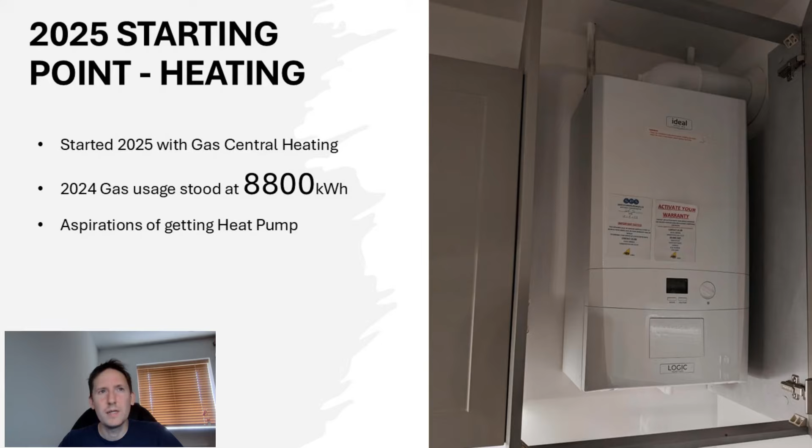Looking back at 2024, we ended the year with 8,800 kilowatt hours of gas usage for heating and hot water. We had aspirations of getting a heat pump, but going into 2025 hadn't yet found the right deal. In terms of solar, it wasn't a great year for weather either. It was very wet. We were still quite close to our 5,000 kilowatt hours generation target.

And in October 2024, we added a new east and west array to bolster our generation. But going into 2025, we only had a couple of months of data from a shaded winter. So there were a lot of unknowns for that system going forward.

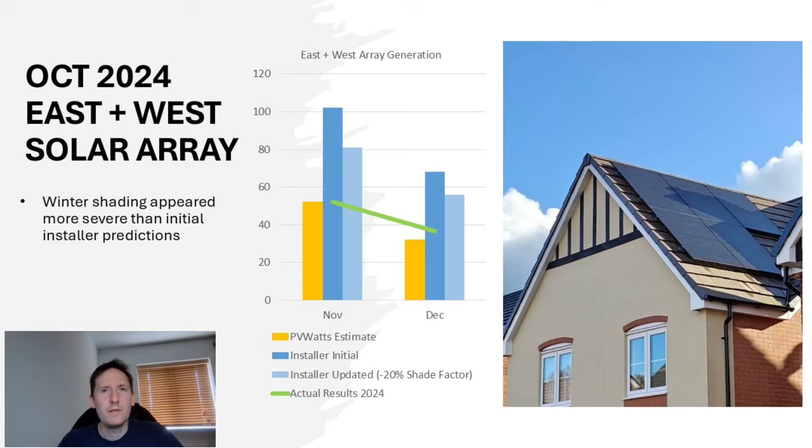We also have two EVs, which between them cover somewhere between 12 and 14,000 miles. The efficiency we believe to be around 3.7 miles per kilowatt hour, and the energy demand based on that is around about 3,500 kilowatt hours.

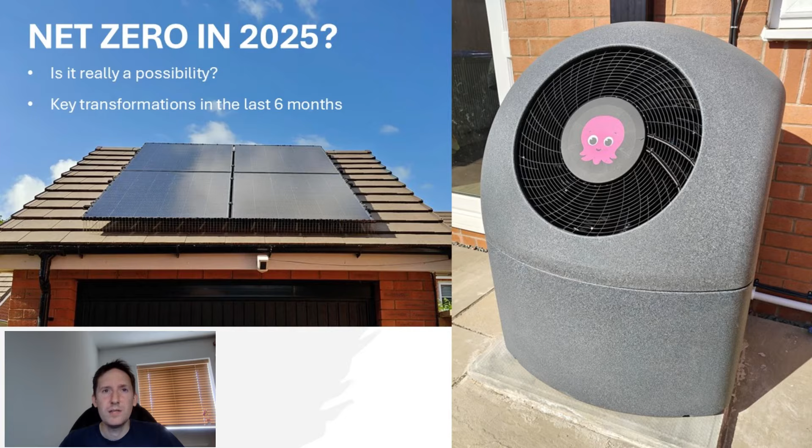With that all said, could net zero energy usage in 2025 really be a possibility? We have made a couple of key additions which perhaps give us a fighting chance this year. Let's get into the analysis.

When I started this channel, there were two key goals I had in mind. The first was to achieve net zero energy usage across the whole year, and by that I mean the annual energy import would be less than the annual energy export, and this would include everything, so heating, hot water, cooking, general household usage, and also I wanted to include charging of both our EVs, which we use for travel.

The second key goal was to achieve negative energy bills across the year. In theory, this should be a byproduct of achieving net zero energy usage, particularly where import prices and export prices vary depending on the time of use. There's a lot of smart tariffs out there that can result in financial viability and even profitability.

So what's my motivation for all of this? On a household level, I believe we're all accountable for our own energy usage. Our individual decisions can collectively make a difference, and we shouldn't wait for politicians to tell us to be greener. I believe the technology exists now, and we can make good use of it.

I want my children to grow up in a net zero energy household to set the best possible example for them and hope they share these values as they grow up. Strong energy independence also protects us from energy bill hikes. Being self-sufficient gives us that extra financial security where energy is concerned.

After continuing to research the topic, I managed to find a heat pump that was appropriate for the property. So we have a 115 square metre 4-bedroom home over 2 floors. The heat loss was measured at 4.9 kilowatts.

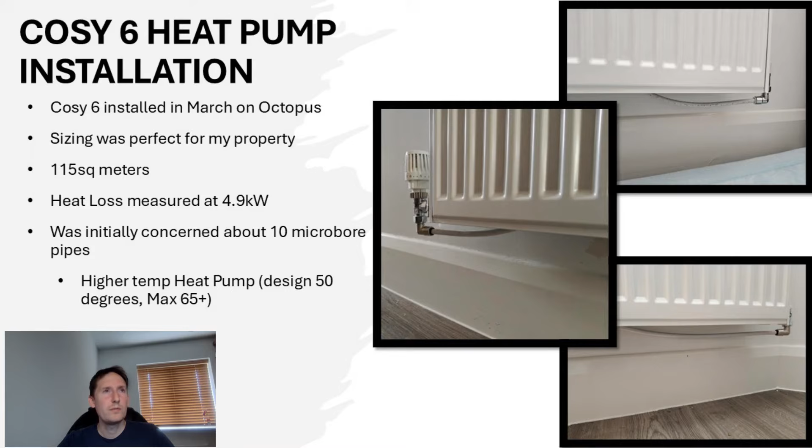The Cosy 6 has a design temperature of 50 degrees rather than, say, 40 that a lot of the others are. It can go over 65 if it needs to. So at that point you're looking at gas boiler temperatures, no problem at all, they're achievable. And overall this seemed like the right kind of product for our house. So as such we went ahead and installed the Cosy 6 in March.

Price was a big contributing factor to being able to go ahead with this. I had quotes in the region of £3,000 to £5,000, and that even included the boiler upgrade scheme grant, which is £7,500, which I consider to be essential for a lot of people to be able to afford heat pumps. Their base prices are still very, very expensive, and the installation price does vary massively from house to house. There's a lot of variables that determine how much it's going to be.

For myself, the stars absolutely aligned, and I'm so fortunate to say that it only cost me £150. I honestly couldn't quite believe it. I was expecting something a little over 500 to 1,000 thereabouts.

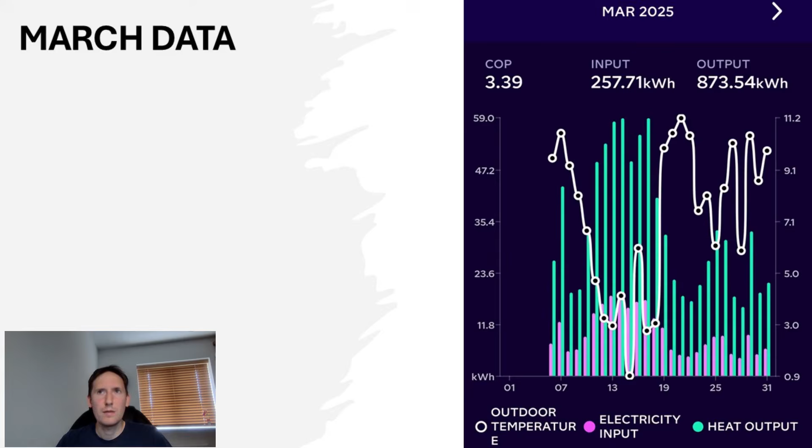So for March, we had a COP of 3.39, an input of just under 260, and an output of around about 873. For April, we had a much higher COP of 3.61, actually, an input of just 161, which means that's how much energy we used over the course of the month of April, and that gave us nearly 582 units of heat.

May, slightly lower COP this time, and you'll notice that our input is much lower. So what's happened here is our heating has not been needed, so a lot of these days are just hot water. Hot water typically has less efficiency, so you'll notice that the COP did drop, and it's a similar story for June as well. So we're looking at 3.47. The input there, very, very low. In fact, it's as low as 42.66. So a very, very cheap month, and we'll look at the numbers in terms of pounds and cost in just a moment.

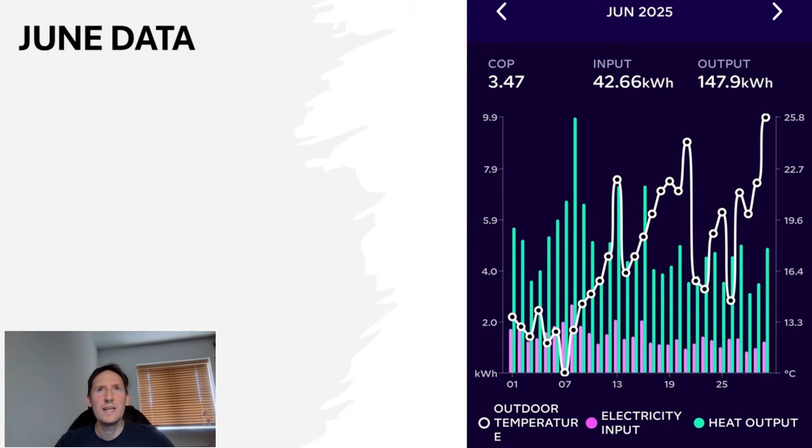But let's look at the lowest usage day. So that was June the 28th. We only used an input there of 822 watt hours for our hot water. Bearing in mind we have a 180 litre tank and we have a family of 4 living here.

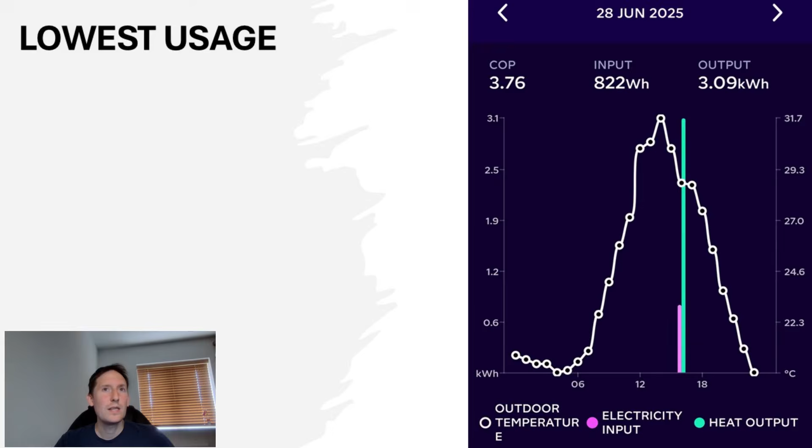Conversely, the highest usage day was actually March the 17th. Bear in mind we don't have any data prior to March the 6th. So March the 17th was the day in the time frame that we have that we used the most. The COP was actually respectable at 3.4. The input was as high as 17.36, but that is interesting and quite useful information because the Tesla Powerwall battery storage that we have, there's 2 of them, and they are 27 kilowatt hours in total. So in the winter, it does seem feasible that the batteries might be able to cover the entire heat pump on a cold day. So that would be good.

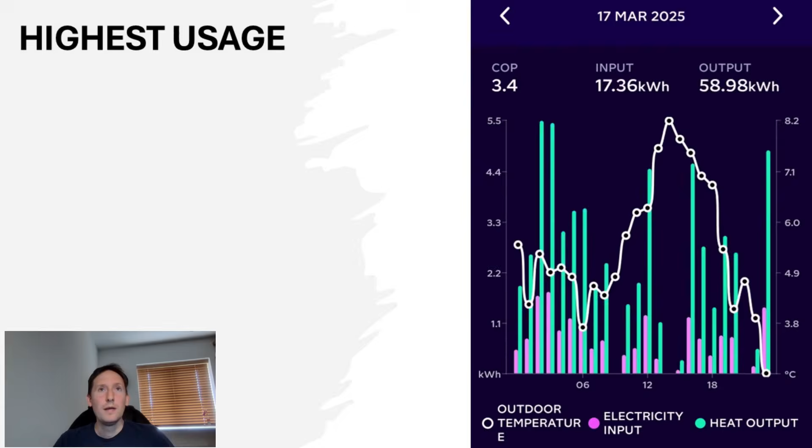In terms of highest coefficient of performance, that was the 30th of June. It wasn't quite 34 degrees as it says there. I think it was about 31 at that point. But you'll notice I've employed a tactic there of getting the hot water cycle on while the weather is warmest. So that gave me a COP of 4.02.

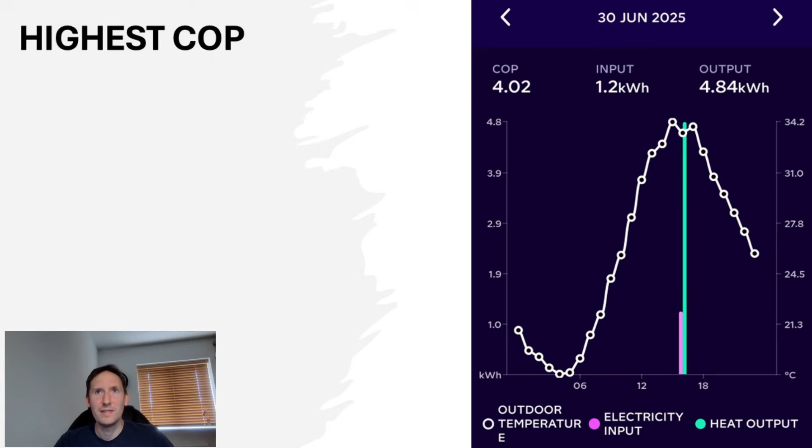So this chart shows how the coefficient of performance changed from month to month. So in March, that was our baseline data there, which gave us 3.39. Then in April, the temperatures did warm up quite nicely. We had a mixture of some heating. Most of the time we did have the heating on in April, but it was warmer, which made the heat pump more efficient. So that gave us 3.61.

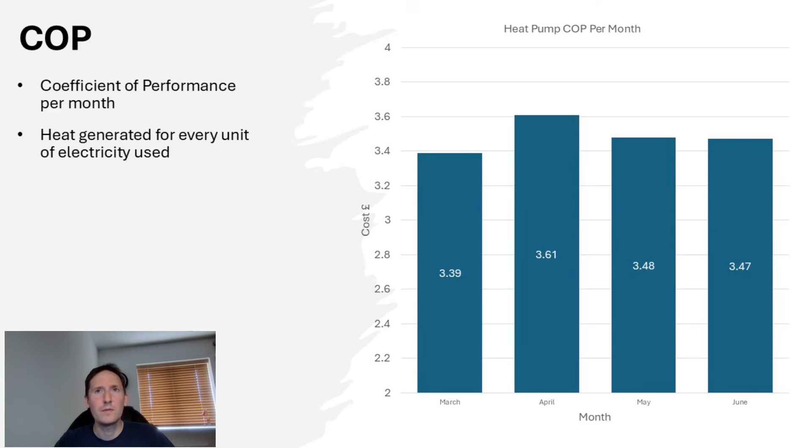In May, we had a combination of a small amount of heating, but obviously much warmer weather. And in June, we had absolutely no heating whatsoever. It was all just hot water. So that gives us 3.47 on that one.

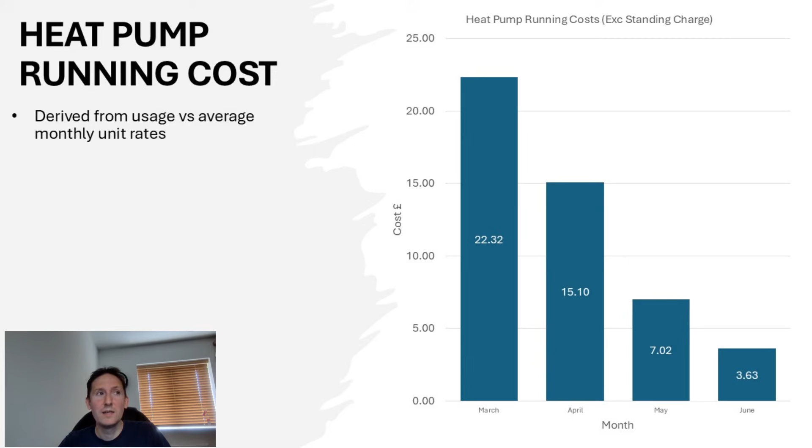So following those calculations, we can now look at the monthly cost of our heat pump. So these are our running costs. So March, £22.32, April, £15.10, May, £7.02, and June, just £3.63, which I think is pretty fantastic.

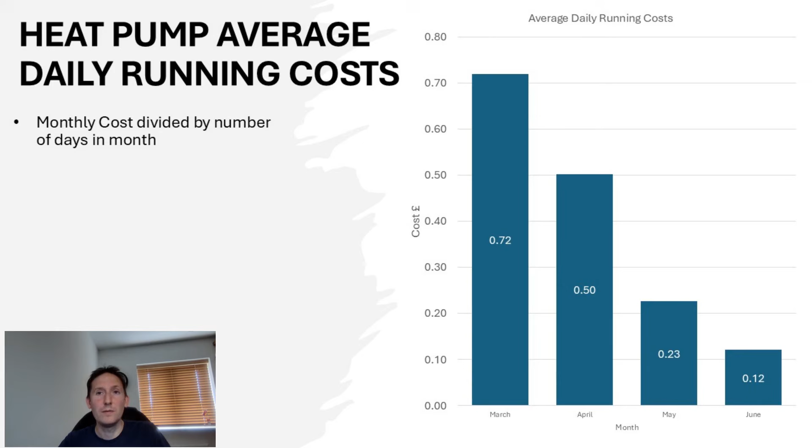So let's look at the average daily costs. So we're looking at 72 pence per day in March. April, we're looking at 50 pence per day. May, 23 pence per day. And June, as little as 12 pence per day. And just going back to the day we used the least amount of energy, there was one particular day where we used just under 7 pence to do our hot water, which is very impressive. So it's fair to say the heat pump looks to be a success at this stage.

But let's look at some of the other aspects of our energy usage, starting off with the gas usage that preceded the heat pump installation. So I still had gas between the 1st of January and the 3rd of March. In that time frame, we used 2,888 kilowatt hours, which is quite a lot. As of 5th of March, the meter was officially decommissioned and the boiler was removed.

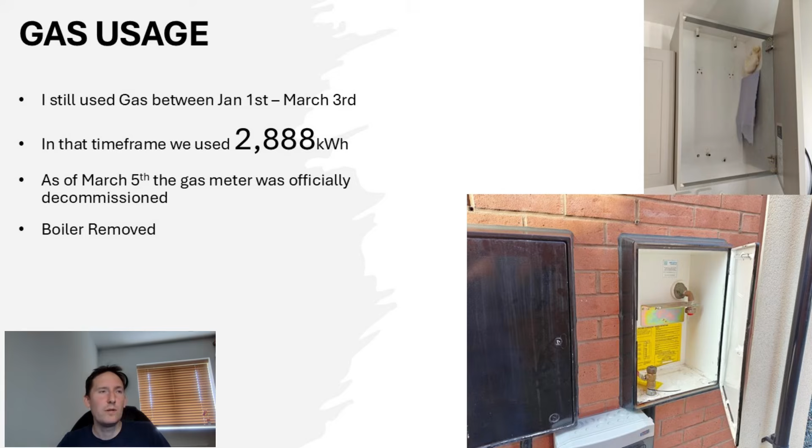Looking at EV charging, so I estimate between January and June it was in the region of 2,100 kilowatt hours. This is subject to a margin of error because our Project EV charger that came with the house, with it being a new build house, it had a charger, but it's not very smart. It doesn't log data, or if it does, I've not been able to find an app that actually is compatible with it at this stage.

So as such, we have some data logged from the Tesla granny charger that's in the garage. So that tracks a little bit of it. The rest of it I had to try and go through my Powerwall data, figure out my usage patterns, and try and establish what was car charging. Car charging does tend to stand out because I do it overnight and it tends to be around about 7.4 kilowatt hours.

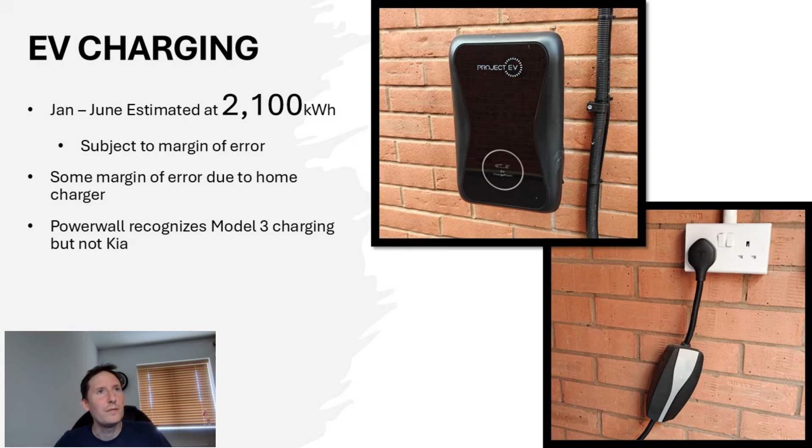And then for general household usage for the 6-month period between January the 1st and June the 30th, we are including cooking, washing, lighting, entertainment, so things like TV watching, computer, games consoles, and obviously working.

We're excluding vehicle charging, and just a note on the vehicle charging, I said that that was a bit of an estimate. Any kind of miscalculation on that would either come off or be added on to this general household usage one. So the total between the two will definitely be correct. It's just perhaps the ratio might be ever so slightly out if I've miscalculated that. But it's also worth noting that I have excluded heating from the heat pump and the gas usage, because we've covered that separately. So that gives us a total of 1,369.

Now, there is a bit of a hidden usage that we need to take into account as well, and that is storage and conversion losses. Now, as effective as storing energy is, it's never completely free. It needs converting from AC to DC, and then back from DC to AC again, and any battery management that goes on. So the total losses as a result of storage was 253 kilowatt hours.

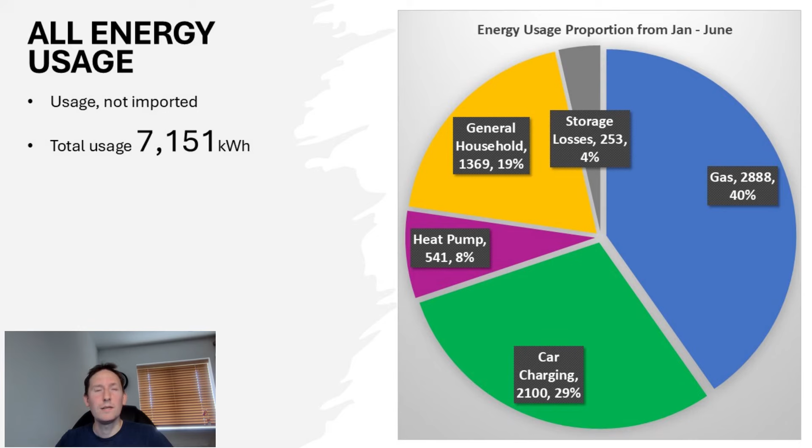Other than that, the next biggest looks to be the car charging, with general household actually taking up a smaller slice of the pie, and losses representing 4% of the total energy usage. So usage is half the battle when it comes to net zero energy usage, but what about generation?

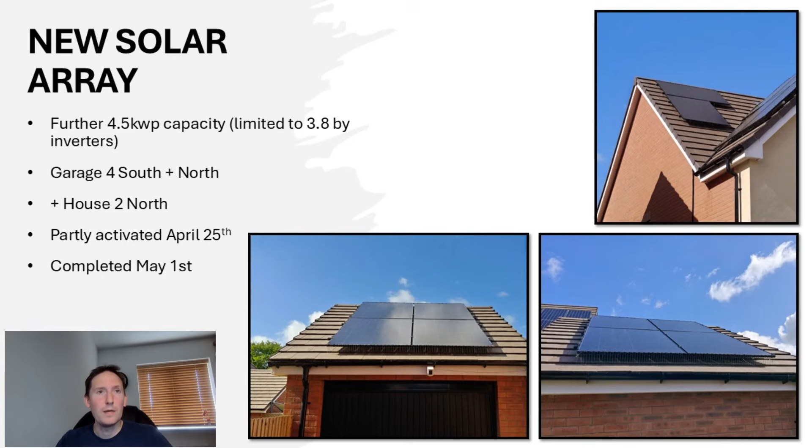That's the other half. And we did have a new solar array installed. This gives us an extra 4.5 kilowatt peak of capacity. It is limited to 3.8 by inverters, but this is a mixture of 4 south facing on the garage, 4 north facing on the garage, and 2 panels on the north of the house. The majority of this was activated on April the 25th, but it was completed on May the 1st, as there was a bit of an incident with a couple of the panels, so they had to get replaced.

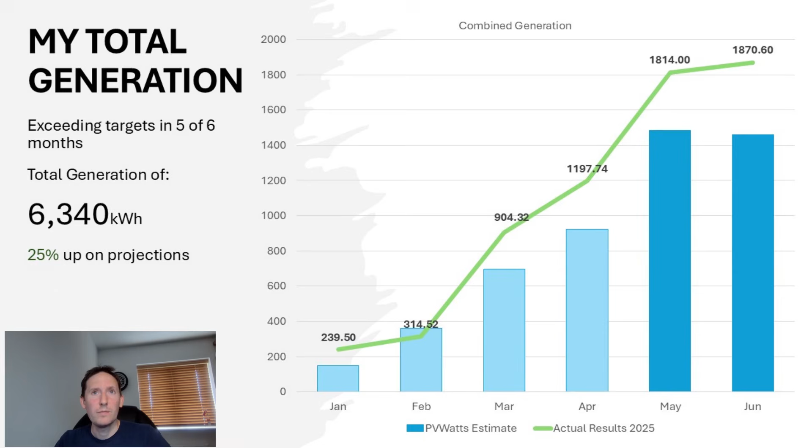So here is the total generation then, and it's been an incredible 2025. The start has been really, really nice. So we've managed to achieve total generation of 6,340 kilowatt hours, which is actually in total 25% up on the PV Watts projections. So on the right there you can see only February really is the one where we've fallen short on expectations. Other than that, we've been comfortably above, so that's really good to see.

I just wanted to highlight how fortunate we've been, anyone with solar panels in 2025, because it has been a fantastic year so far for solar. In fact, March, there's an article on the Met Office website that suggests it's actually the sunniest throughout the month since records began in 1910, with 185 hours of sunshine throughout the month.

And it wasn't just March that was good, April was good too. Great Britain managed to achieve maximum solar generation record according to Solar Power Portal. Obviously some of that was due to additional installations across the country, but there was also a great deal of sunshine there. Check out my monthly solar generation videos, and you'll see more details in terms of how my systems have been performing.

This does give us a solar offset at this point in the year, so end of June, of 88.66% of total usage. Now remember, this was including gas usage prior to March the 5th, and also we only had the additional solar fully online from May the 1st. So the second half of the year should be a little bit better than that.

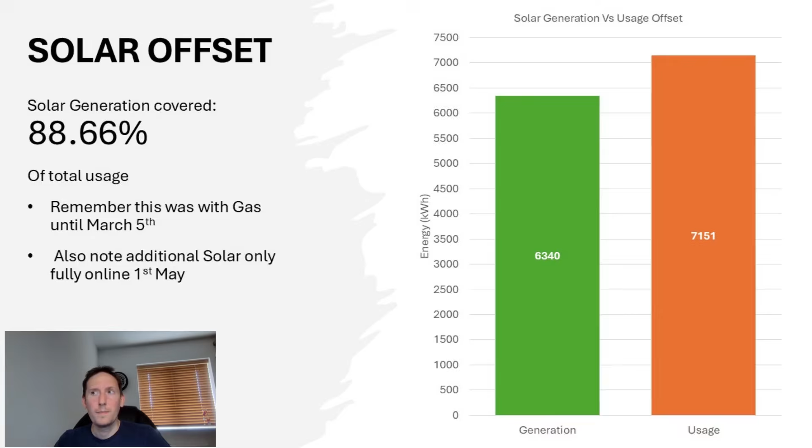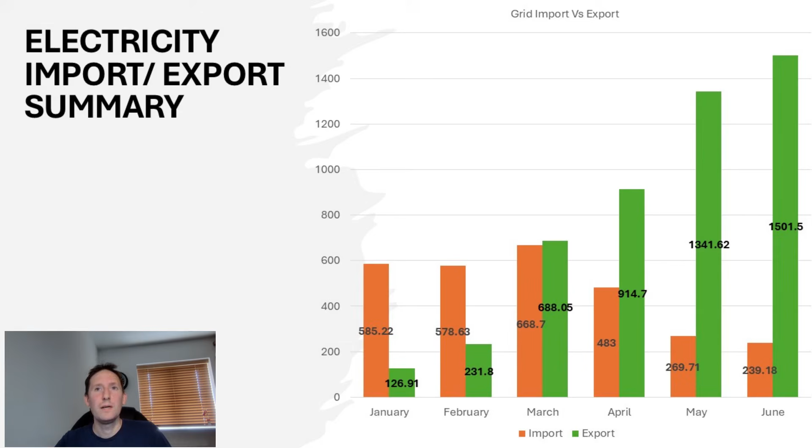So here is a visual summary of how the electricity import and export has changed. Note that January and February are a little bit low actually on import. They would be much higher, but because we're using gas, which is excluded from this particular table because we're only talking about electricity here, those values are a little bit low, but they are of course higher in winter and reducing downwards. The export does the opposite. It's very low in the winter with the seasonal variance, less light hitting those solar panels. May and June we do of course have that new installation, which makes a big difference to the amount of export there.

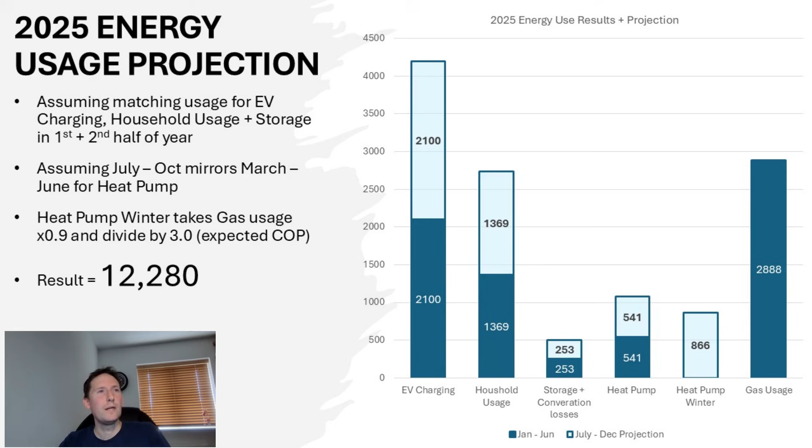For the heat pump, it's a little bit different because we only had that active since March, so we can make assumptions that July to October probably would mirror March to June. And for the winter side of what the heat pump might do, we can take the gas usage, multiply that by a factor of 0.9, and then divide by 3, if we're assuming an expected COP of 3, which I think is probably around about what we're looking at. If all those assumptions are correct, that would give us a result of around about 12,280. So that's energy usage.

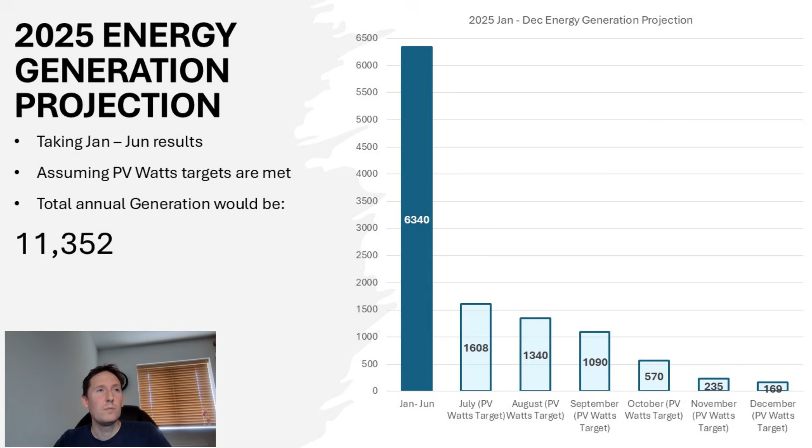Let's look at energy generation projections. We can take the January to June results as they are, and rather than extrapolating that based on the weather as it currently is, I think it probably makes more sense to assume the PVWatts targets are met. The annual generation in that instance, if you added all that together, would be 11,352. So looking at those two values, our solar offset is not quite enough to meet our usage, but you never know. We've had some very, very good weather in the first half of the year, so if we get that in the second half, that gives us a fighting chance.

And realistically, if we're able to get some savings in terms of energy usage, maybe we can find a few more efficiencies there. That might also give us a fighting chance. Ultimately, we were kind of undone by those first couple of months of gas usage in 2025, but it's possible. Things have been pretty good so far. It looks like all the ingredients are in place, so check back in 6 months. But looking ahead to 2026, if we take the same assumptions as before, we should have solar generation which would not only meet our usage demands but exceed them by nearly 5%. If that was the case, I would be very happy with that.

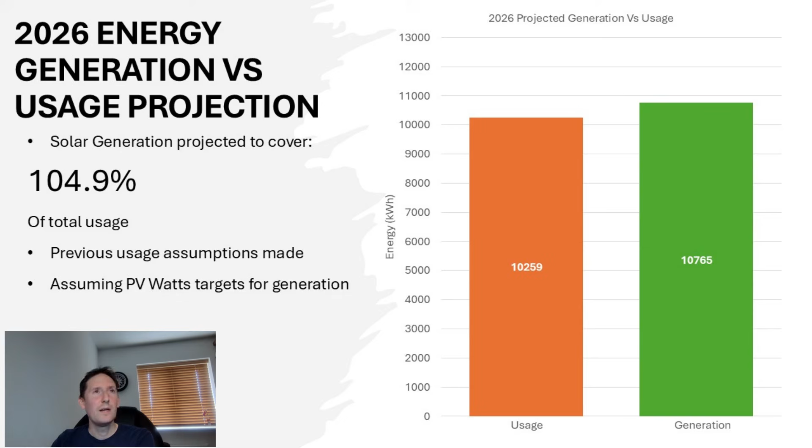So looking at the future outlook, we are of course already pretty close to net zero in 2025. We may not achieve that, but it's looking like no further investment is needed based on what we already have. Positive bill credit is projected to be strong in 2025, probably at least £300, which is good. And our current system is very adaptable to tariff changes. So if our 15 pence export gets taken away, we can just shift the way we use our electricity and our storage, and do things a little bit differently to whatever any new tariffs would make optimal.

In terms of risks, heat pump efficiency is untested at sustained sub-zero temperatures, so you never know, it might be quite a bit below 3 on the coefficient of performance. We'll see how that goes. Technical faults could obviously affect generation. I hope not. Everything's been pretty reliable so far, but that's always a possibility. And weather fluctuations: it's been very, very strong in 2025 so far. Sometimes it's a case of what goes around comes around, and sustained periods of great weather are sometimes followed by sustained periods of bad weather. So we'll see how that goes.